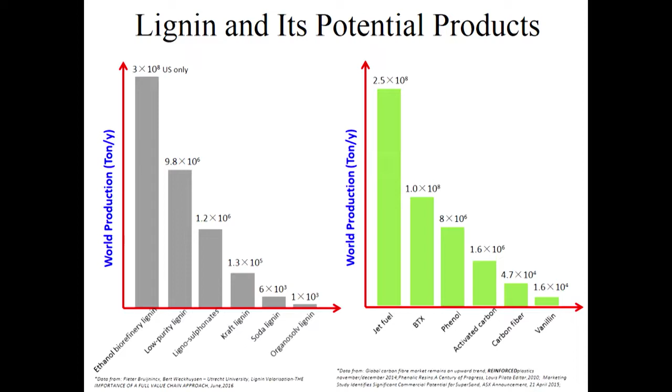For the aviation industry currently, biojet is a short-term and a long-term solution, facing not only politics and air quality issues, but all kinds of solutions come down to one. Of course, the aviation industry, just like the experts here were talking about in all aspects, is very important.

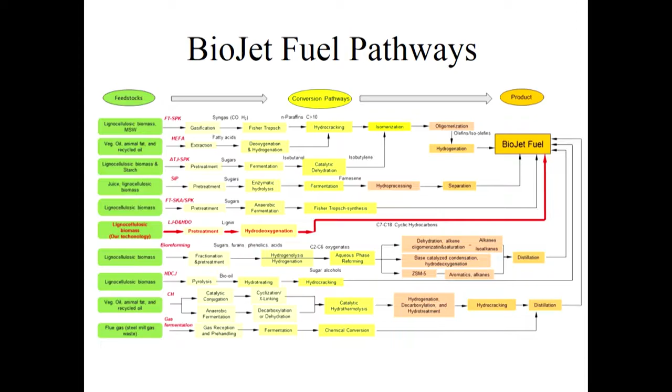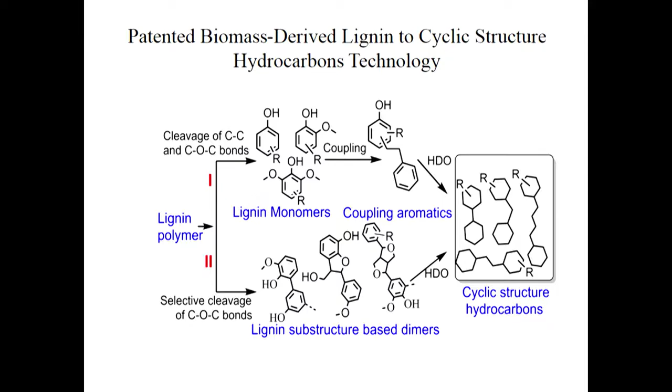So our technology, I showed here. This is one of our issued patents. We've presented not only technologies and patents, but also the economics, recently published in a journal. What is the lignin jet fuel we're talking about? Very simple. We're talking about jet fuel using the aromatic structure to generate hydrocarbons in the C7 to C18 range. We assume they can be jet fuel components. I will show you later on how far we've reached.

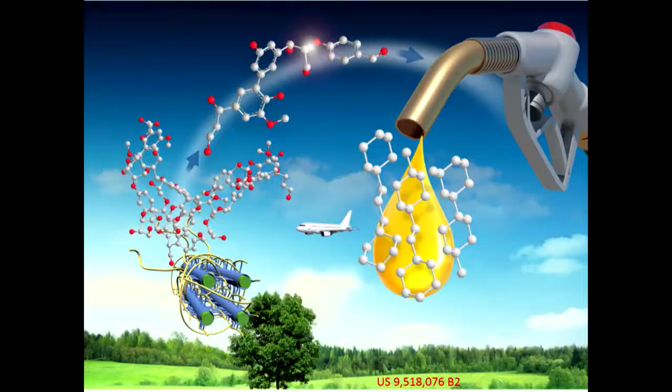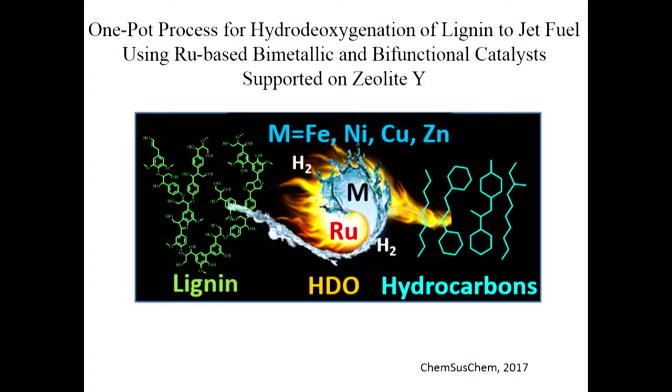So this is the journal that published our patents. And you see the structure here. Because of the ring structure, we probably get more energy content or possibly energy density as well. We also developed several catalysis processes. One of them is a bimetallic process. With a double metal catalyst, we can generate this type of compounds. We also have a Lewis acid associated with a noble metal, so we also can generate similar stuff.

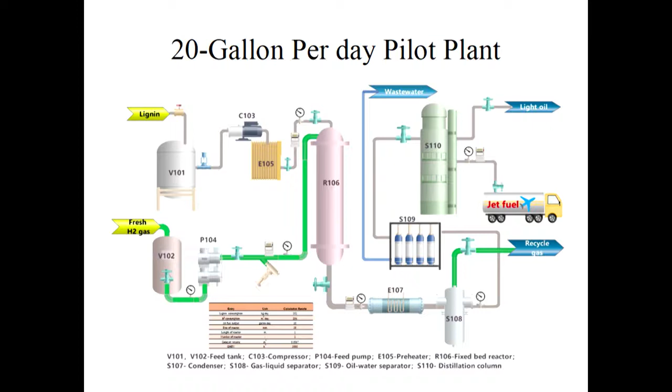In the meantime, we also found a difficulty. Other dehydration compounds can decrease the catalyst lifetime. So those are the issues we're going to solve in the future. And this term, we also designed a 20-gallon per day pilot plant. We didn't build it. We're testing a small reactor because it's not really easy, like 50K to solve this problem, probably more. But this tells you we can continue feeding. We tested the feeding and how the results look.

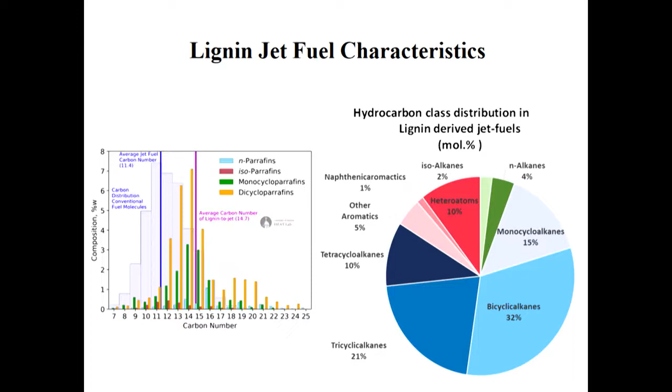So this is the result. The result is actually not that simple. We used GC×GC and worked with other universities. We see lots of monocycloparaffins and dicycloparaffins and lots of heavy compounds. For an easy comparison, you can see the world survey average for different compounds. This is FT and Jet A-1. Most of what we're talking about as blend stocks is actually blending with Jet A-1. So this is Jet A-1.

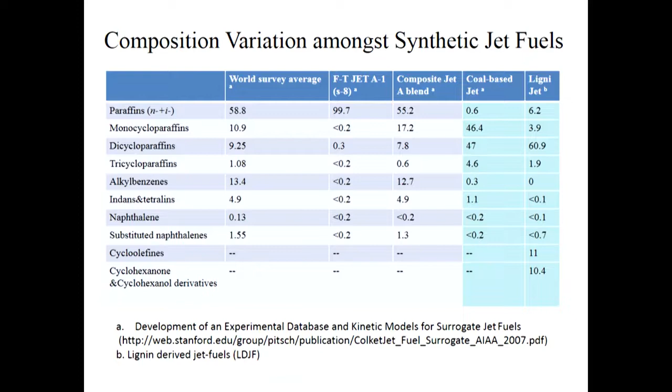But remember, 20 years ago, there was a coal-based jet, JP-900, led by, I think, Texas and Southwest Research Institute. I talked to them. So this is actually the compound they produced, versus whatever we have, and I found it very interesting. So there are monocyclic paraffins and dicyclic paraffins. The ratio is different, okay?

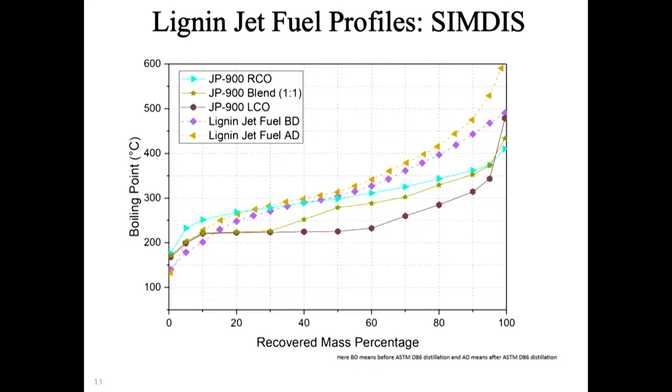So I don't know if it's good or not because we certainly did not really do distillation. We're not really supposed to do this because I wanted to see how much raw conversion can be done, and because the refinery is going to have different issues. So this is the SimDis result. You see, JP-900 versus lignin. So we're still a little heavy, but it's very close, okay? It can be done by interpreting different compounds or maybe doing an extra process to get very similar compounds.

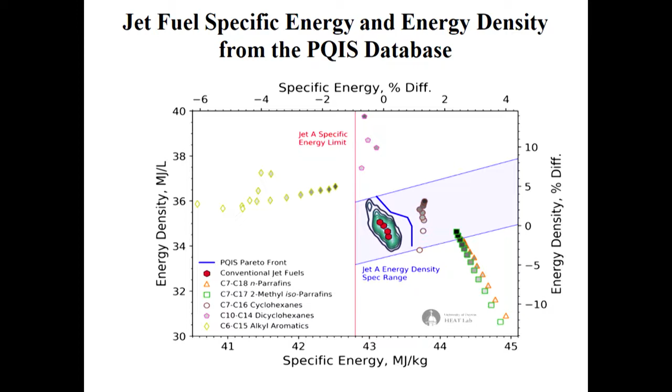So what does the future need? It requires high energy content, high energy density, and a more efficient engine, okay? The most important thing is we have to align with our Aviation Center, which actually at WSU is now the lead in the whole nation. So one of the projects that we're going to do is find the new jet fuel for new engines, higher efficiency, less emission. So for the compounds, most of the monocyclic paraffins fit here, but the dicyclic paraffins fit here. So we have to move this one up. So that's going to be the next future work, okay? Hopefully we can still continue to get funding from JCATI, okay?

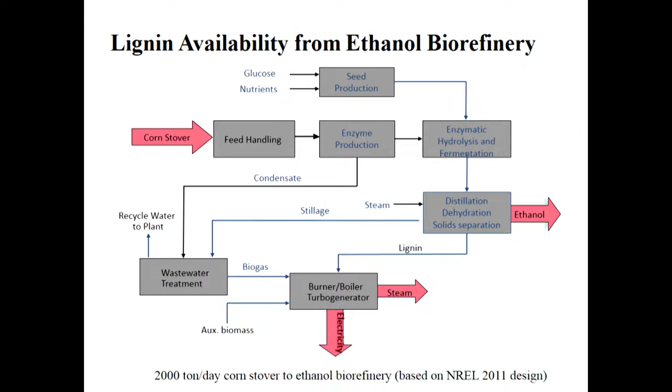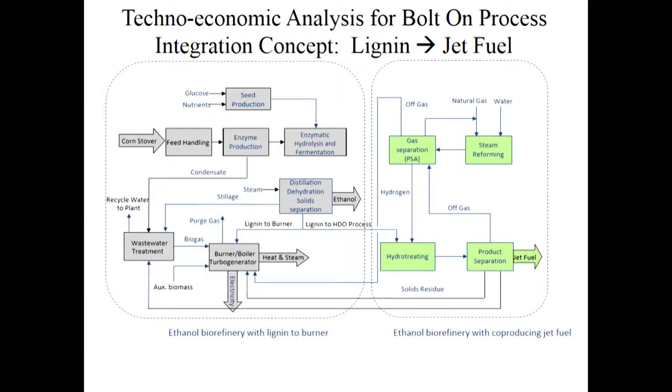So we think we can make the assumption to say 23% is already available. You can directly convert it to jet fuel, right? And also we may just buy electricity because electricity is much cheaper, but we can still use the lignin to generate steam, which is convenient. So that design comes with this: this is a refinery, this is jet fuel production. You see hydrogen, we can generate it from natural gas. So we did the Aspen modeling for this, okay? So this is an Aspen modeling calculation. So we put in different scenarios.

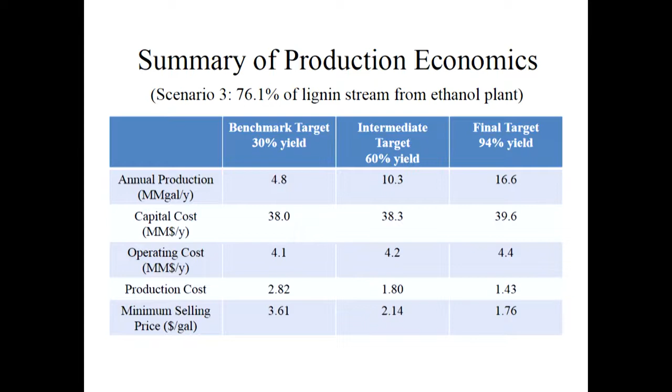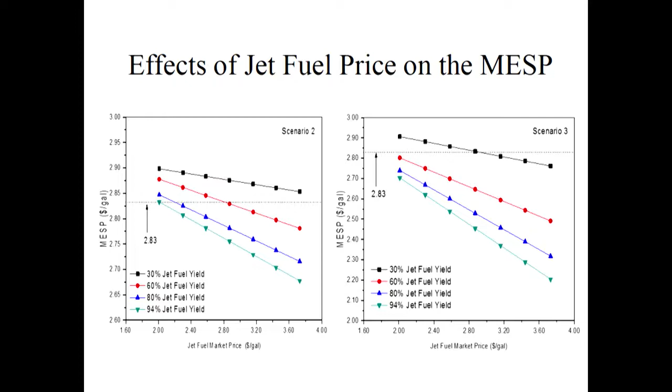So economics, 23%. This is actually the minimum selling price, okay? So if you go very theoretical, you get $2.50. Today it's $2 something for jet fuel wholesale. However, if you put in 76.1%, which is where we buy electricity outside, we can end up at $1.70. So that's actually comparable, and more importantly, it can also be synergetic with ethanol. We can lower the ethanol price, make it perfectly synergetic, okay? I don't want to say it's a pie in the sky, but what we learned is the co-production of ethanol and jet fuel is going to be the best scenario for future refineries, okay?